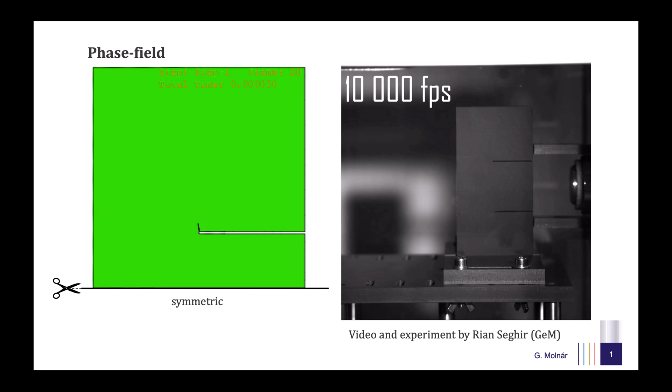To start, I will present a relatively complex example, both experimentally and through simulations. This experiment was conducted by my friend Rian Seghir in Nantes during my postdoc years. Here, a projectile approaches from the left and impacts a polymer specimen.

As the elastic wave reaches the pre-notch, a new crack initiates at a well-defined angle. The crack then accelerates and branches at a specific point. Interestingly, these features remain consistent across experiments, revealing key fracture characteristics.

Remarkably, using just two material parameters, the phase field model is able to quantitatively reproduce the crack's initiation, propagation, and branching. In this talk, I will demonstrate how this is possible through the diffuse crack representation employed by this technique.

I will also discuss the additional phenomena we can model using the phase field approach, how to identify the regularization crack length in real materials, and how we can use this length scale to homogenize the toughness of metamaterials, a property traditionally considered non-local.

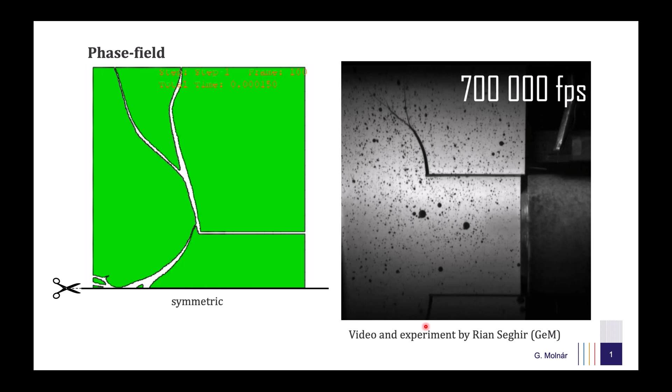I come from a mechanical engineering background, but my research has taken me across multiple disciplines. I completed my PhD in civil engineering, focusing on the material properties of structural glass. My work spanned multiple length scales.

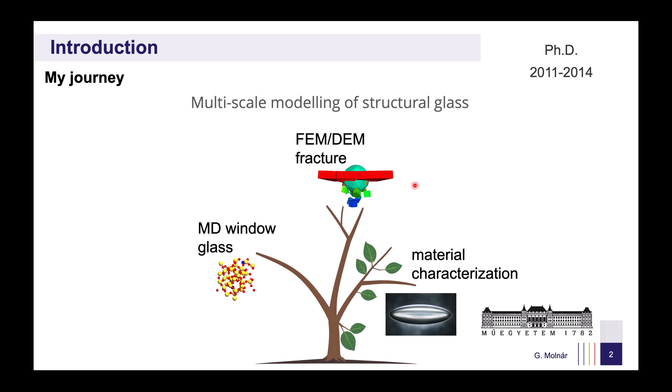At the atomic scale, I studied the elastic properties of glass. At the mesoscale, I analyzed the impact of manufacturing defects. Finally, at the macroscopic scale, I investigated the total fragmentation of tempered glass using the hybrid discrete and finite element method.

My first postdoc took me to Lyon, where I worked on the atomic analysis of plasticity in glasses. Using molecular statics, we identified the microscopic events responsible for plasticity and developed a microscale inspired yield criterion for silicate glass.

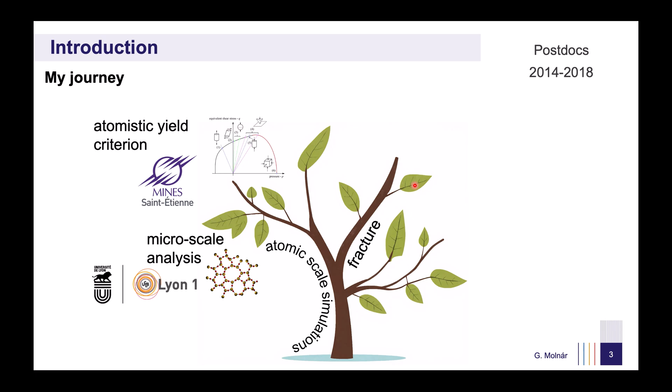Next, in Saint-Étienne, I implemented this yield criterion into a finite element code and calibrated its parameters using microscale experiments. Following this, I moved to Grenoble, where I studied cellulose nanofibrils at 2 different scales, using both atomic simulations and discrete beam-like methods. Realizing that traditional yield criteria fail to account for fracture under tensile loading, I shifted my focus...

...to the phase field model back in Lyon. I then completed my postdoc years in Nantes, working on dynamic fracture in architected materials.

After being accepted into the CNRS, I proposed 2 principal research directions: atomic scale techniques for extracting failure properties from small-scale models. This work led to multiple state-funded projects where we successfully identified internal length scales in glasses.

Macroscopic fracture simulations. This effort fostered a strong collaboration with MATEIS, particularly with Aurélien Doitrand. Through my career, I have worked closely with both academic and industrial partners, notably with the nuclear industry in France and NEG, a glass manufacturing company in Japan.

Most recently, I have opened a new research direction in the optimization of architected materials. This work is now advancing through a collaboration with the University of Sherbrooke, focusing on toughness optimization in silicon-based batteries.

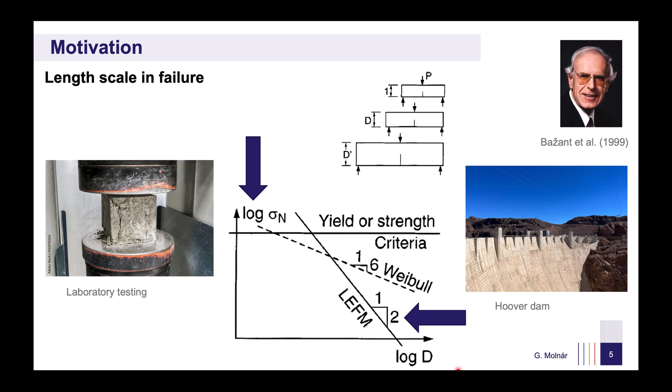My work is motivated by a fascinating phenomenon. Notably, when material samples are small, they appear to be much stronger than when they are part of a large macroscopic structure. This phenomenon was popularized in the 1980s by Bažant, particularly in concrete and rock materials.

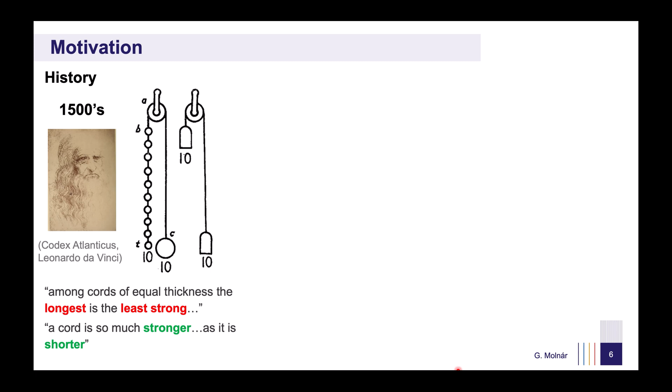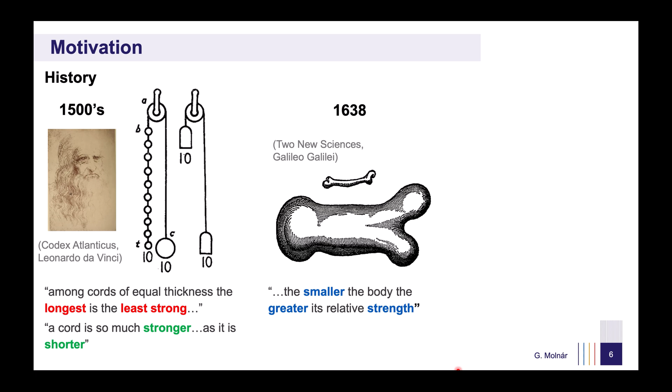The first recorded observation dates back to Leonardo da Vinci, who noted that smaller cable segments seemed stronger than their longer counterparts. Around 150 years later, Galileo Galilei made a similar observation, stating that smaller bones and structural elements tend to be more resistant. However, neither he nor Da Vinci provided a theoretical explanation for this effect.

It took another 50 years for Mariotte to propose a theory. He suggested that the larger the structure, the higher the probability of finding a large defect. Importantly, he clarified that the intrinsic strength of a material does not decrease, but rather the presence of the defect reduces the observed resistance.

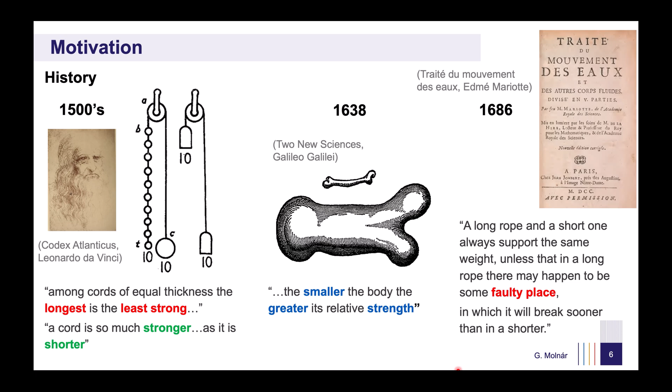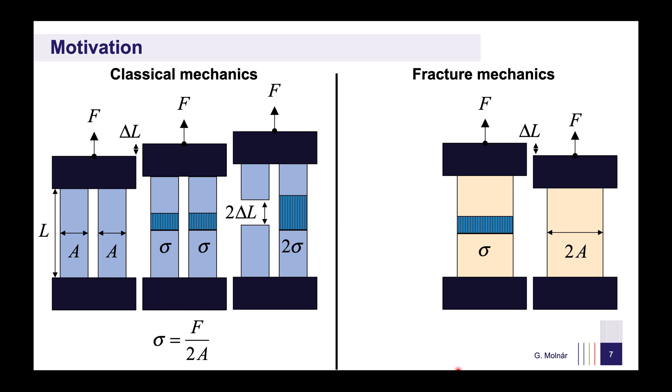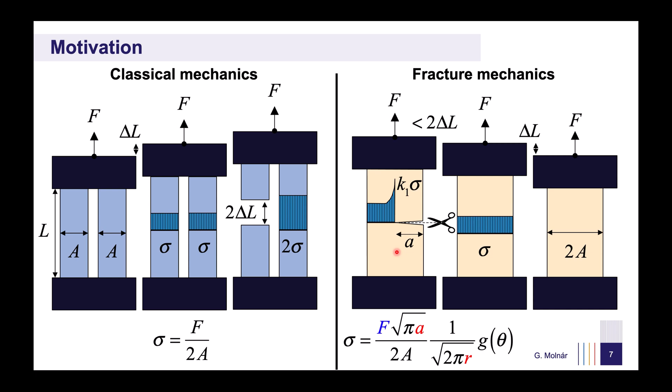However, if we cut one of the columns, the remaining column must carry twice the load, leading to a 2-fold increase in stress. Now suppose we glue the 2 columns together with an extremely strong adhesive. If we apply the same load, the stress remains identical to the original intact case. However, if we cut the sample at the center, we create an infinite stress peak. As a result, traditional mechanics cannot predict when the structure will fail using a simple stress-based strength criterion.

To address this issue, in the 1920s, Arnold Griffith reformulated the conventional approach to material failure. Instead of just comparing stress and strength, he looked at atomistic interactions. He noted that while the maximum force in an atomic bond can be linked to the strength of the material, the interaction does not simply end at the maximum force, it has a gradual decline. From this, Griffith proposed that forming a new crack surface requires a certain amount of stored energy to be released. He correlated this energy to the integral of the interatomic force.

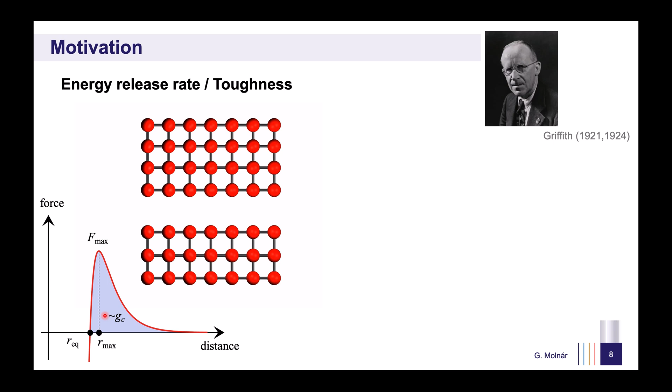Later, George Irwin provided experimental validation of Griffith's theory. He demonstrated that when a specimen is sufficiently large, it behaves as predicted by Griffith's energy-based criterion. However, when the sample is small, its resistance is better described by stress-based failure criterion.

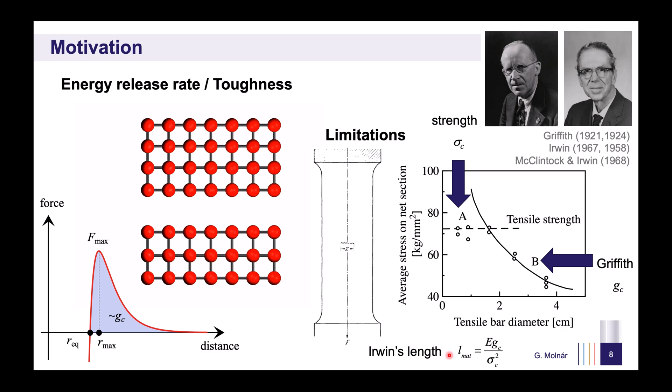Irwin was also the first to introduce an approximation for the transition length scale. He showed that the simplest material length can be defined using E, Young's modulus, Gc, the toughness proposed by Griffith, and sigma c, the material's tensile strength. Interestingly, while Irwin is widely recognized for developing the stress intensity factor, this particular finding was overlooked for decades.

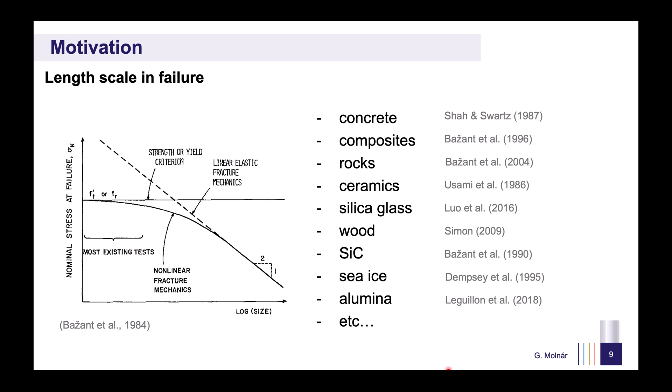Since Bažant's revival of this concept, the size effect has been experimentally confirmed across a wide range of materials, from silica and ceramics to ice sheets.

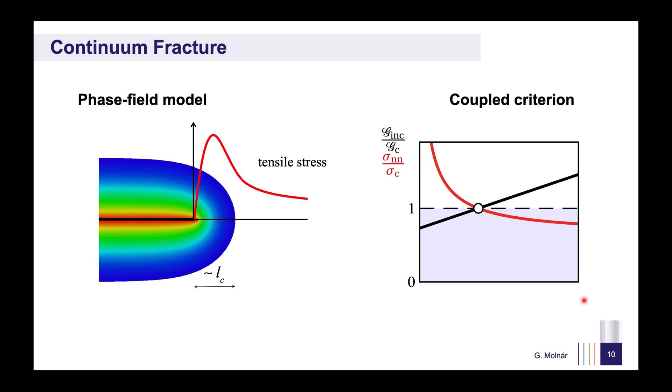In the first scientific part of this presentation, I will show how the length scale parameter in the phase field model enriches linear elastic fracture mechanics. I will focus on simple cases where the size effect is most evident. However, we treated phase field simulations as numerical experiments, essentially as black boxes. To better understand the results, we turned to finite fracture mechanics, more precisely the coupled criterion, to explain the observed behavior. This powerful technique helps interpret automatic results produced by the phase field approach.

The history of the phase field model dates back to the early 90s. It was van der Waals who first proposed a continuous function to describe an atomic bond, challenging the traditional view that these interactions behave like rigid trusses. He was later awarded a Nobel Prize for his discovery.

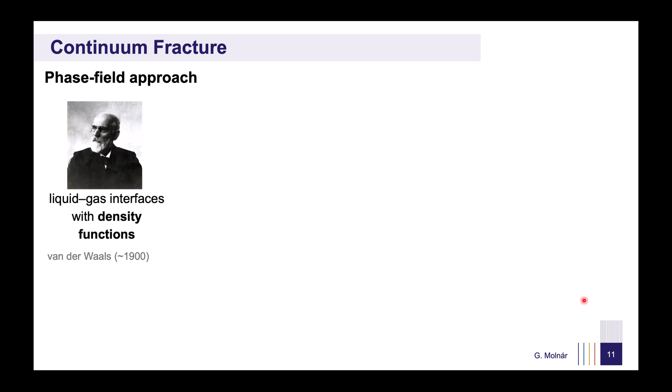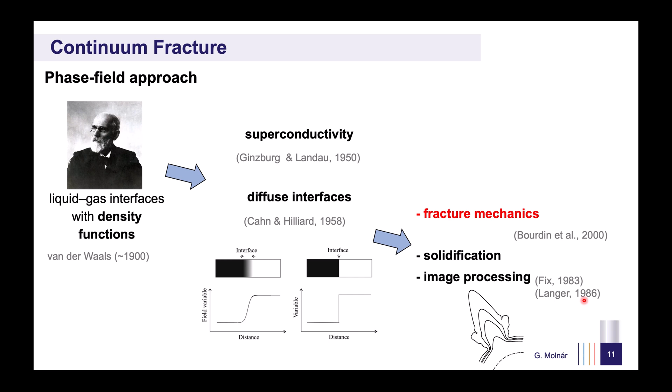However, the mathematical foundation of the phase field approach was established in the 1950s by Ginzburg and Landau. They introduced a continuous function to describe discrete phase transitions, arguing that changes between phases should be gradual rather than abrupt. The formulation we use today, however, was developed by Blaise Bourdin, who adopted classical damage mechanics to establish a smooth transition between broken and unbroken materials using a state variable which we will denote as d.

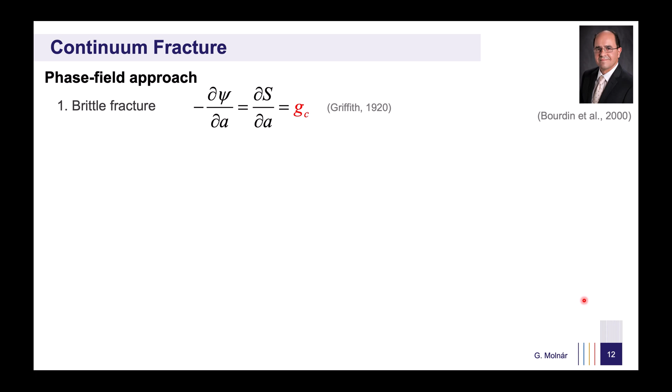Bourdin's approach was based on Griffith's original criterion, which states that a certain amount of energy is required to create a new crack surface. To advance this idea, he used the variational formulation of Francfort and Marigo, which determines the size of the new crack based on an energy minimization principle.

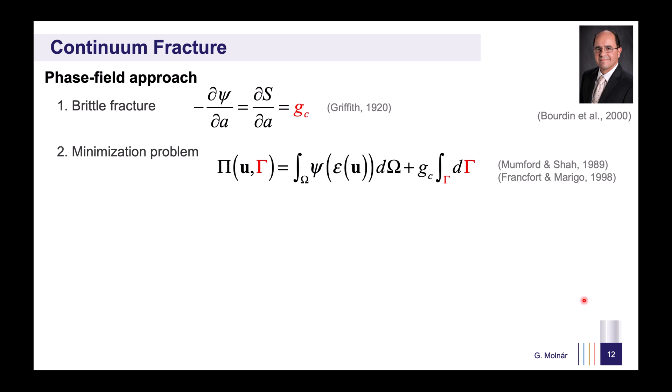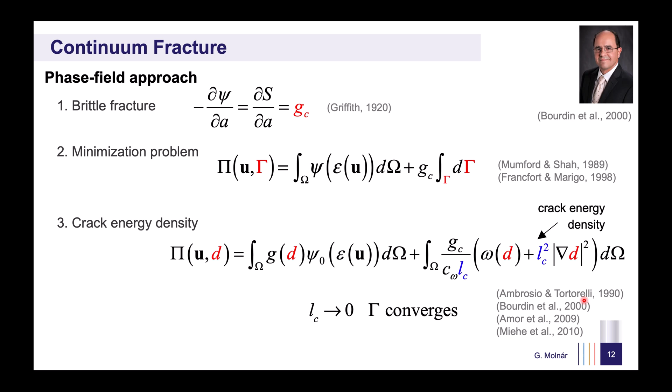However, in their original work, the crack surface gamma was still treated as a discrete quantity. The breakthrough came when Bourdin, Francfort and Marigo introduced the crack surface density, utilizing the Ambrosio-Tortorelli functional to diffuse the crack over a small region, thereby transforming the discrete problem into a volumetric one. However, they ensured that when the internal length scale LC tends to 0, the model recovers the original discrete problem.

In a sense, the phase field model allows us to solve fracture mechanics problems using variational methods. One of its major advantages is that it does not require any additional criteria to model mixed mode crack propagation and reproduces experimental observations robustly.

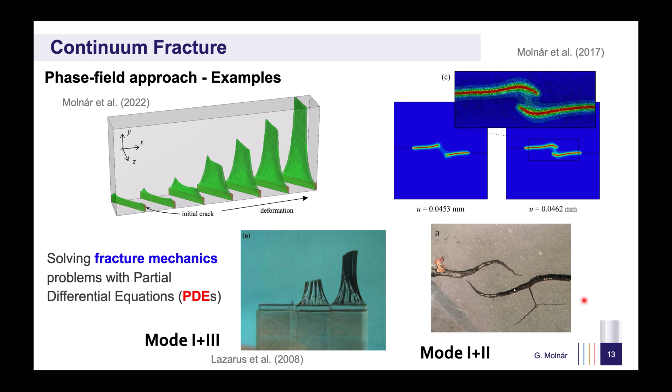In this talk, I will focus on 3 fundamental fracture modes, demonstrating how traditional linear elastic fracture mechanics can be misleading and how different length scales naturally emerge in even the simplest fracture cases. In mode 1 tensile opening, I will show how the initial crack size affects the critical loading.

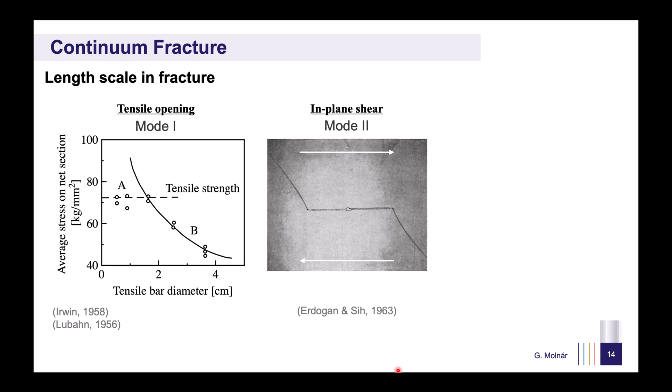In in-plane shear, I will explain why the crack branches at an angle, depending on the regularization scale, instead of propagating in a self-similar manner as originally assumed by Irwin. Finally, in anti-plane shear, I will show how the primary crack breaks into smaller facets, daughter cracks, which then merge to follow the loading direction.

In all 3 cases, we will see how regularization enables insights that are not possible using traditional linear elastic fracture mechanics.

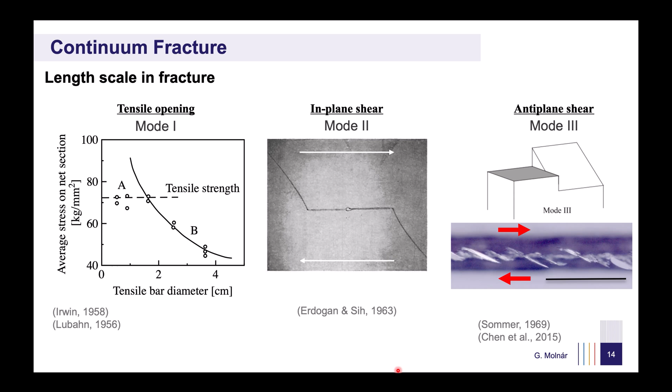However, since phase field simulations do not always explain why certain phenomena occur, we will use the coupled criterion to better understand these numerical results.

The coupled criterion states that a crack can initiate and propagate only when both stress, strength, and energy-based conditions are satisfied. For example, in mode 1 tensile opening, if the applied load is low a longer crack is required to dissipate the necessary energy to create a new fracture surface.

However, the crack does not propagate because the stress remains below the material's strength. As we increase the load, we eventually reach a point where both conditions are simultaneously satisfied. And this defines a finite crack length.

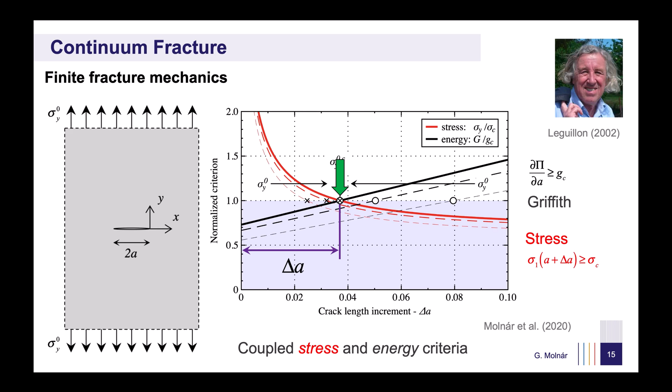By examining critical loading in mode 1, we find that both phase field simulations and the coupled criterion successfully reproduce the experimentally observed size effect. When the initial crack is large, the behavior aligns with Griffith's prediction. However, when the crack is smaller than LC, the failure follows a stress-based criterion.

These results allow us to compare LC, the length scale used in phase fields, with the tensile strength used in the coupled criterion. You observe that as LC increases, the tensile strength decreases, a trend that can be perfectly fitted using the homogeneous solution of the phase field method.

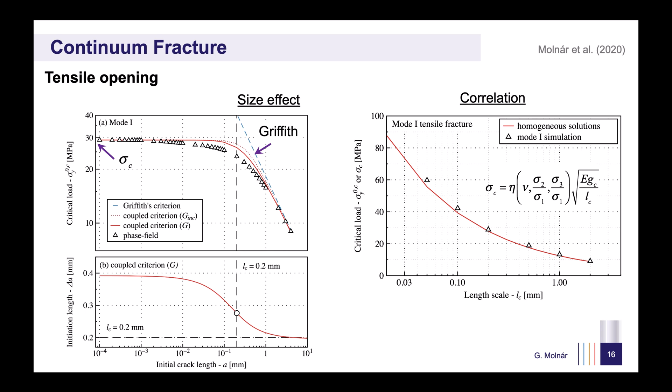For shear fracture, contrary to Irwin's assumption, the crack does not propagate in a self-similar manner. Instead, it branches at a well-defined angle, which depends on the ratio between initial crack size and LC. This angle varies between 45 and 73 degrees.

45 degree corresponds to the direction of the principal stresses in shear, while 73 degrees is consistent with experimental observations for very brittle materials with very small process zone. And it aligns with the maximum energy release rate direction.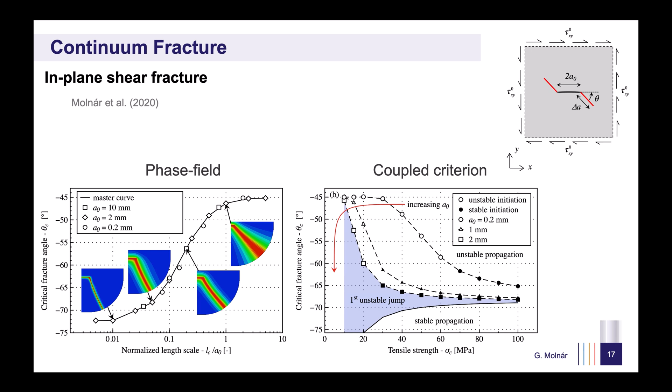The coupled criterion confirms this behavior: when the tensile strength is high, the preferred branching angle is around 70 degrees. However, when sigma c is small, the angle gradually converges to 45 degrees.

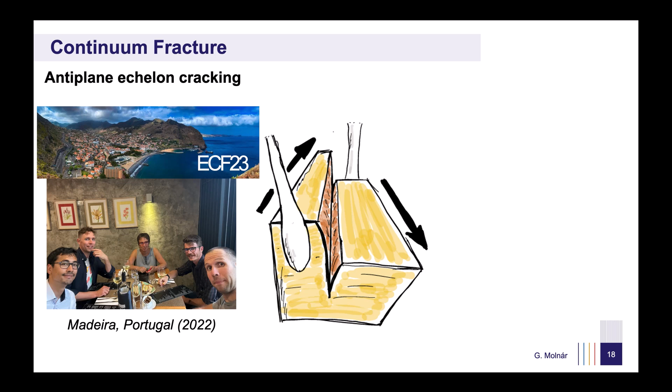The third example was inspired by the conference dinner in Madeira. During the dinner, my colleague Aurélien Doitrand sacrificed his flan, a gelatinous cube. He cut a notch in the middle of the dessert and applied anti-plane shear using 2 forks. Surprisingly, the fracture pattern mirrored those observed in many brittle materials, forming a hierarchical facet-like structure.

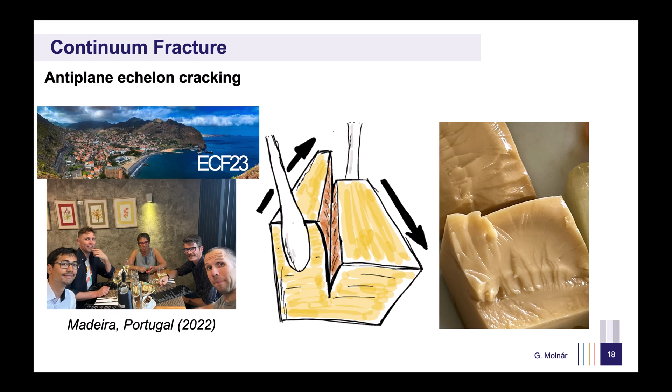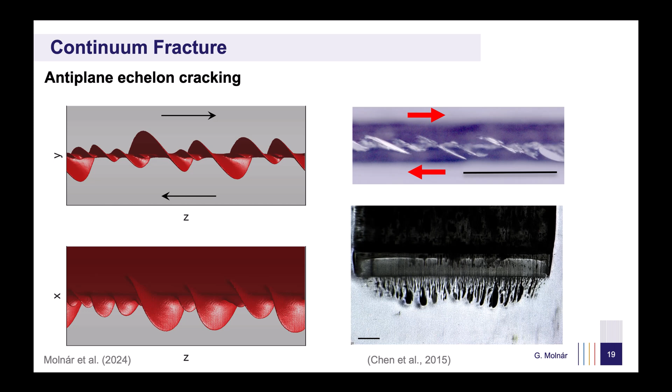Motivated by this, we applied the phase field model to solve the problem, and it successfully reproduced the facet formation seen in PMMA experiments. When summarizing all our correlations, we see the same trend.

As LC increases, tensile strength decreases. However, this relation is not a unique single curve, but rather a failure surface. This is confirmed by plotting the length scales derived from the coupled criteria, showing that all distances scale linearly with LC, but differ depending on the loading case.

This leads to an important conclusion: LC is not the size of the process zone. While it influences the process zone, local instabilities depend on the specific fracture case.

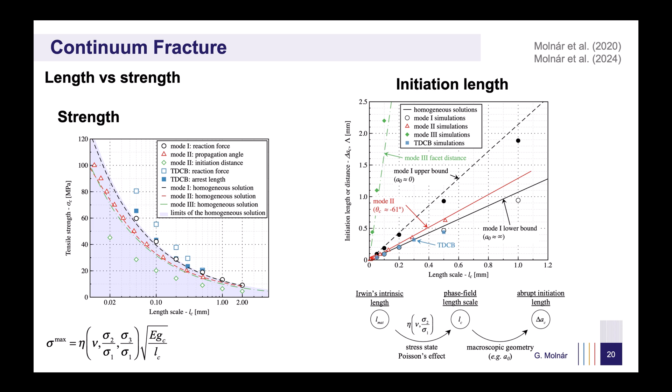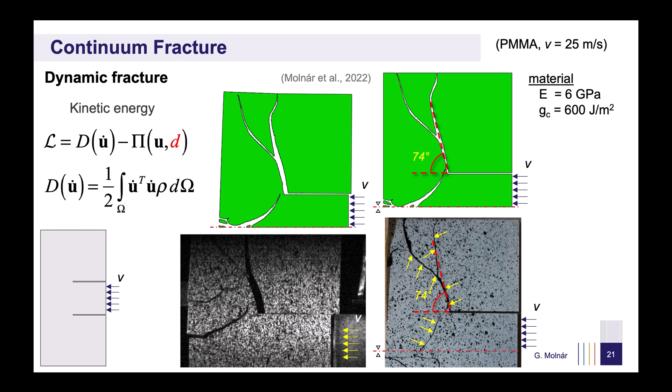Finally, as seen in the introduction, the phase field model can accurately capture dynamic fracture patterns. Using only GC and LC, it achieves excellent correspondence with experimental results in terms of initiation angle, branching location, and crack velocity. Interestingly, in both experiments and simulations, crack propagates at a limiting speed of only 60% of Rayleigh wave speed.

We attributed this to local stiffness reduction in the process zone. However, when introducing viscoelasticity, this limit is overcome, as seen in polymers. Ali, a postdoc at the time, correlated this to local stiffness increments, as illustrated in the final slide.

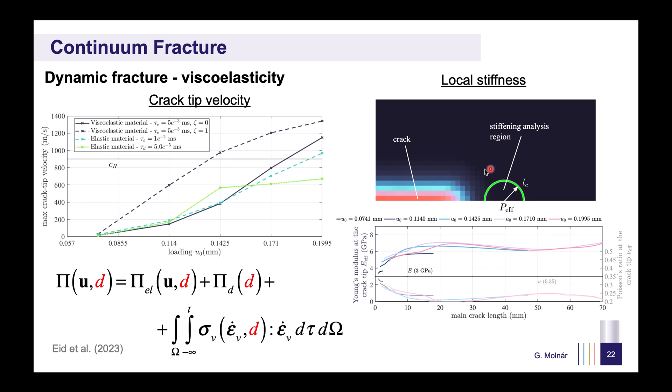We have seen how powerful the phase field model is in capturing various fracture phenomena. Now I would like to shift our focus to an important question: how can we measure different length scales in real materials?

We chose glass as our material of interest because it is relatively simple and lacks a macroscopic length scale. Unlike polycrystalline materials, glasses have no grains, grain boundaries or dislocations, making them ideal for modeling at the atomic scale.

Silicate glasses consist of randomly distributed atoms forming unique ring structures. This structure was first theorized in the 1930s, but was only recently confirmed using atomic resolution electron microscopy.

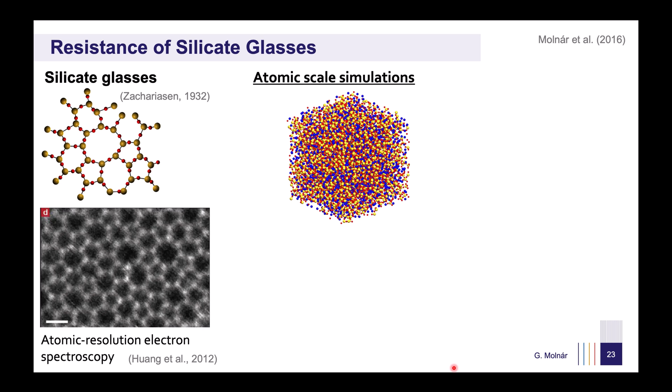In this study, we use molecular dynamics and molecular statics to investigate the mechanical response of silicate glasses. We employed a simpler pair potential consisting of an exponential and a hyperbolic term, with Coulombic interactions handled using long-range solvers or Wolf truncation methods.

The glass samples were generated randomly. They were first heated above glass transition temperature and then slowly cooled to form a stable structure. Finally, we verified the atomic structures using experimental measurements to ensure their accuracy.

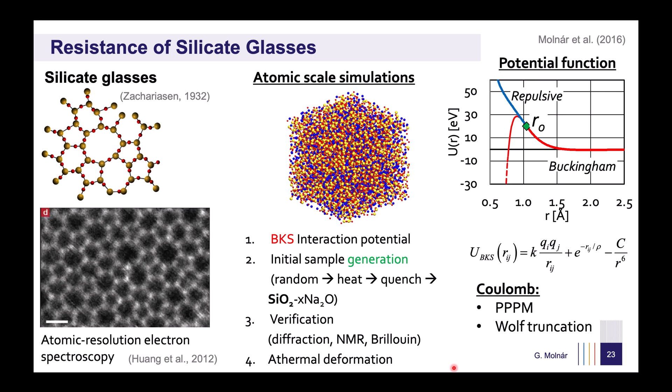To study their mechanical behavior, we applied quasi-static deformation, meaning time and temperature effects were ignored. Coming from a continuum mechanics background, our goal was to bridge the gap between atomic scale results and macroscopic material properties.

To achieve this, we applied a Gaussian convolution technique to coarse grain the discrete atomic data. This technique ensures both mass and energy conservation, allowing us to define continuum-like quantities for atomic scale simulations.

Through this approach, we identify the first length scale, the minimum region in which a discrete material can be considered a continuum. For silicate glasses, this length scale was found to be around 8 to 10 angstroms.

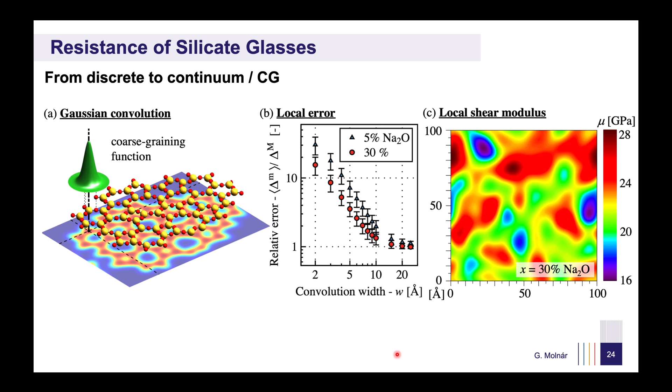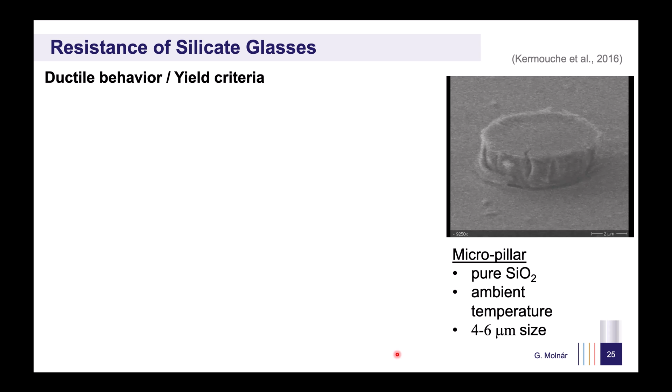Using molecular dynamics, we tested the material under different loading conditions, varying the pressure state, and identified 3 distinct responses: brittle failure, softening, and plastic deformation.

These results allowed us to formulate a densification-dependent yield criterion, which we then calibrated against experimental data, ultimately identifying the yield strength of silica in the range of 5 to 7 gigapascals, a value much higher than those used in standard glass design.

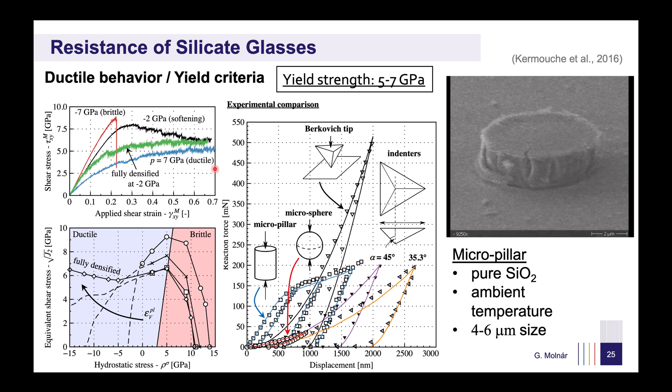At the atomic scale, we can directly observe the microscopic events responsible for plasticity in glasses, known as shear transformation zones. These plastic events involve local shear deformation with a volume change and exhibit an ellipsoidal shape and an exponential decay in strain distribution.

This provides us with a second length scale, the size of these plastic zones, which we found to gradually increase up to 7 angstroms as the material transitions from elastic deformation to plastic flow.

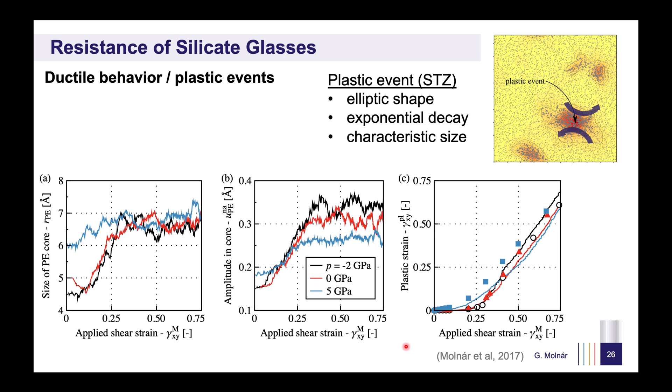By summing the strain jumps in these shear transformation zones, we successfully recomputed the macroscopic plastic strain, confirming that these local events are indeed the fundamental carriers of plasticity in silicate glasses.

When we increased the sample size along one direction, we observed the formation of shear bands due to the localized softening. For a long time, shear bands were believed to form due to local damage, a reduction in shear strength.

However, by measuring local material parameters such as densification, rigidity, and yield strength, we found that shear bands actually increase in density, which in turn increases local rigidity.

This contradicts traditional damage mechanics, which would predict a reduction in stiffness. Instead, the true cause of shear band is not damage, but the phase transition that weakens the yield strength.

By introducing a gradient term to describe plastic strain, similar to phase field models, we were able to recalculate global energy variations and define a third length scale for glass deformation.

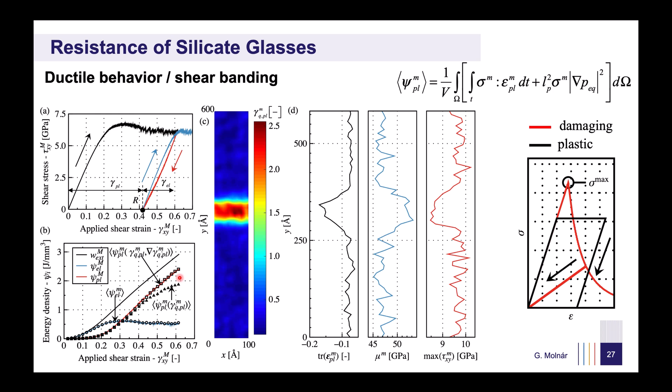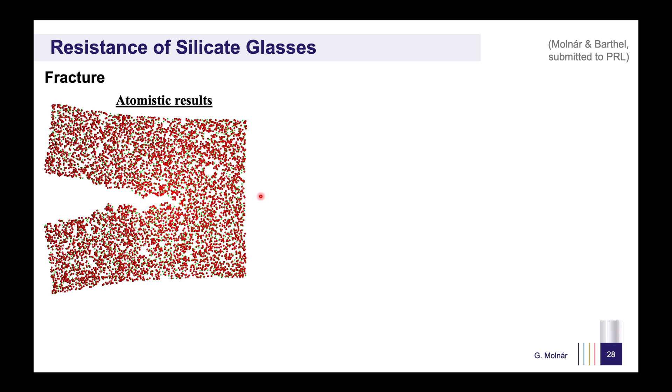To overcome this, we used the phase field model to fit stress, strain, and energy values obtained from the coarse-grained atomic model. This allowed us to identify a diffuse damage zone around the propagating crack.

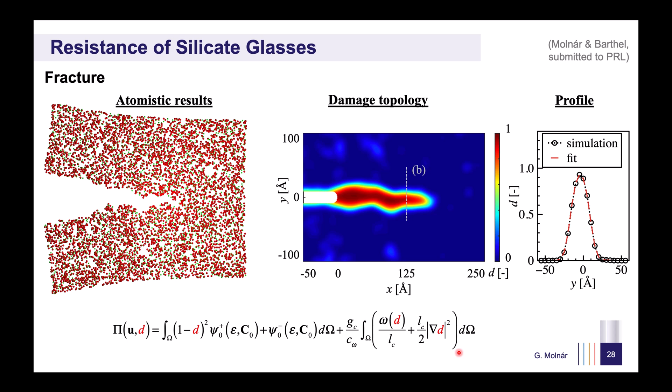With this information, we were able to distinguish between free and fracture surface energies. In theory, both quantities represent the energy required to create a new surface, but experimentally their values differ significantly.

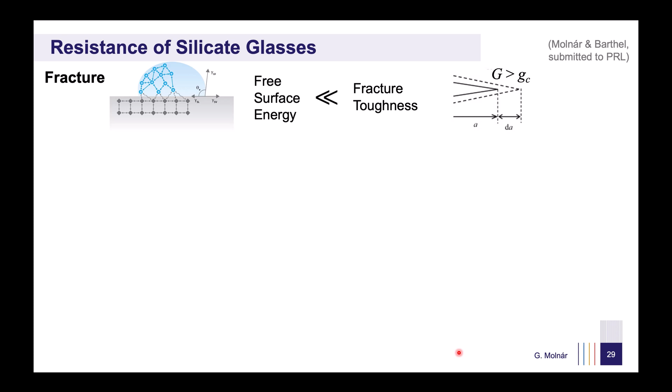We showed that by subtracting the elastic energy from the coarse-grained potential energy, the free surface energy could be made visible. Examining the global energy balance, we confirmed that this free surface energy contributes only a fraction of the total energy dissipated.

By using either the phase field fracture surface or the surface identified through the free surface energy, we obtain toughness values that align well with experimental measurements. This confirms that diffuse damage exists and that it is not plasticity but damage that establishes the correlation between free and fracture surface energies.

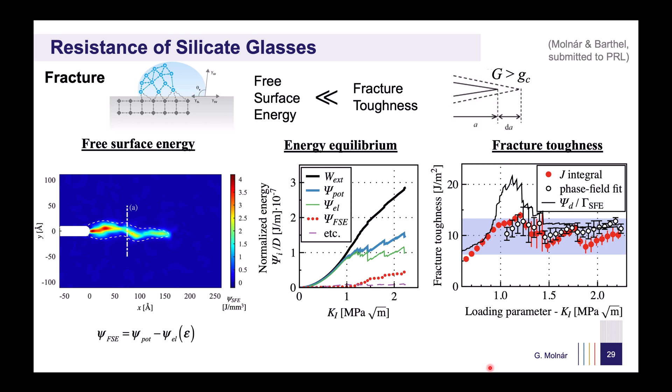Now that we have seen the power of phase field models and how to identify regularization length scales for a given material, let's explore how we can use regularization to determine the fracture toughness of a microstructured material. Mechanical metamaterials, particularly lattice structures, are promising alternatives to bulk materials.

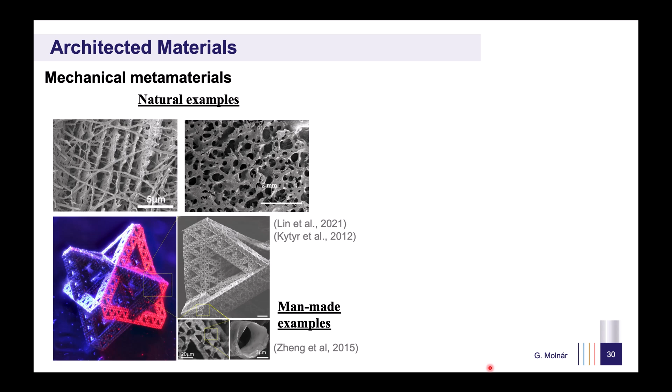These structures are lighter, and because of their small scale, their elementary strength is much higher. As a result, they are widely used both in nature and in industrial applications due to the advancement of additive manufacturing. In this presentation, I will show how we can use both Euler-Bernoulli beam models and a phase field approach to analyze the fracture in these structures.

We will assume that the beams themselves are flawless and that the junctions do not introduce stress concentrations. The beams fail when the tensile stress exceeds the critical microscopic stress value.

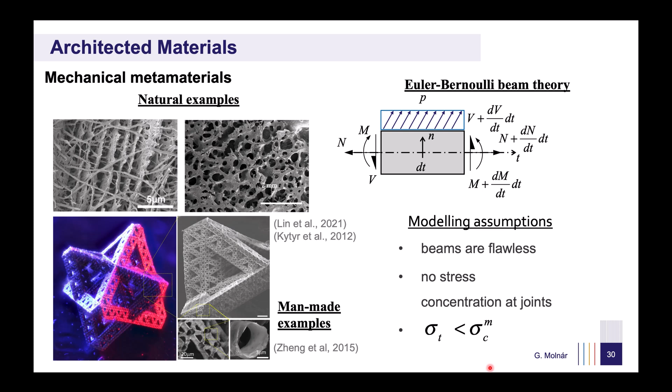This leads us to an important question. If the representative volume element contains all relevant mechanical properties, could we determine its fracture toughness and create a homogeneous phase field model? This phase field model should fail at the same critical load as the lattice and reproduce the crack patterns observed in the microstructure across different loading conditions.

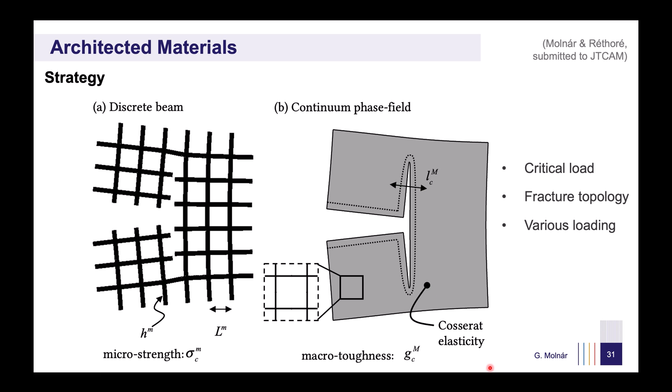Before constructing the model, we need to verify that the unique fracture toughness exists for a beam structure. To do this, we observed crack propagation in the beam model. By measuring the crack length and tracking the change in potential energy, we could define a critical energy release rate. We found that apart from initial fluctuation, this value remains constant, independent of the crack length or geometric features.

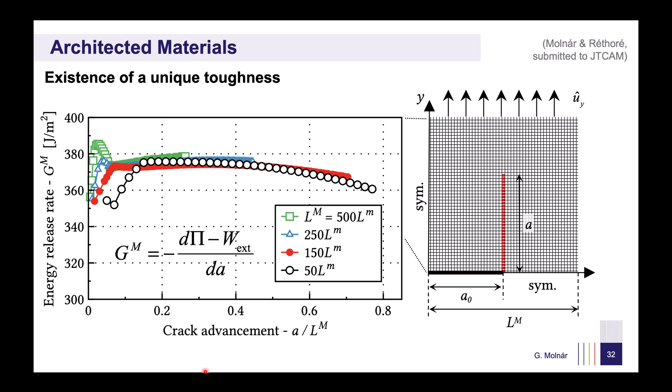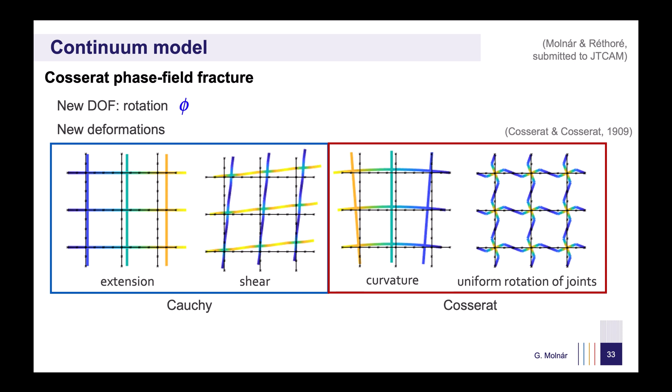To transition to continuum models, we adopted the Cosserat theory, which introduces an additional degree of freedom and independent rotation at each material point. This allows us to incorporate additional deformation effects beyond the classical Cauchy elasticity, such as extension or shear interactions. In this new model, we introduced curvatures and independent rotations, enabling a more refined description of the deformation and failure.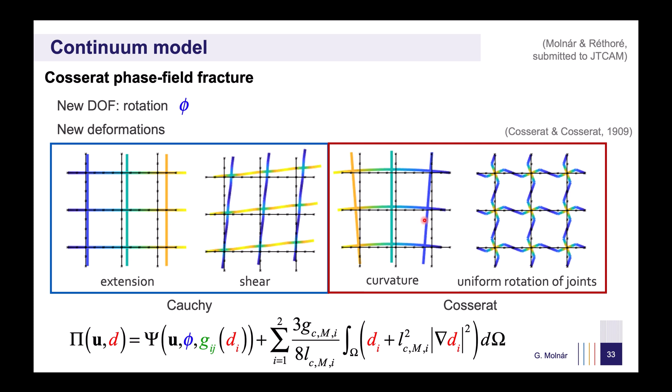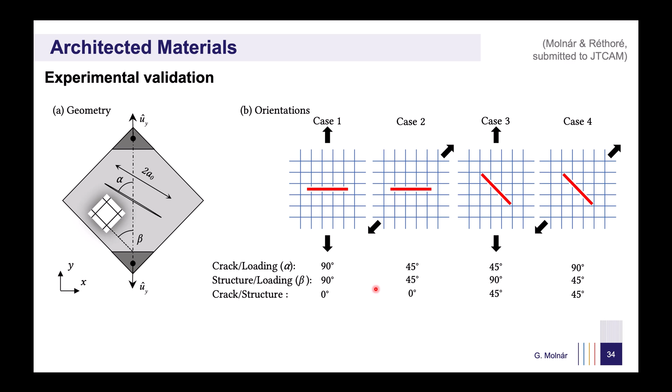Finally, we defined the Cosserat energy and introduced two independent damage variables to account for fracture in two perpendicular directions. Because of the underlying microstructure, fracture in these materials involves a directional dependence, leading to four principal combinations of failure modes. Comparing our simulation results to experimental observations, we found excellent correspondence between both models and real-world fracture behavior.

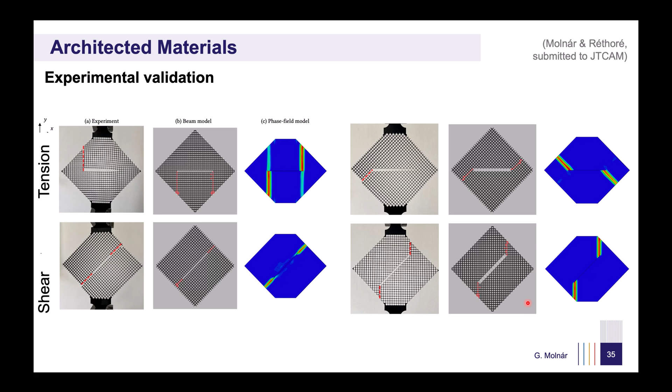In conclusion, this work demonstrates that although regularization length was introduced as a numerical aid, it plays a fundamental role in modeling and understanding complex fracture phenomena.

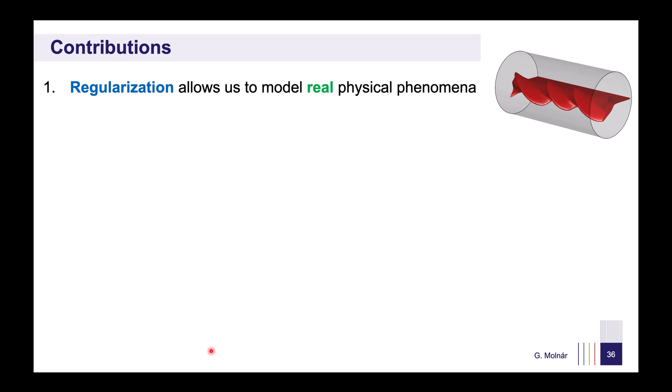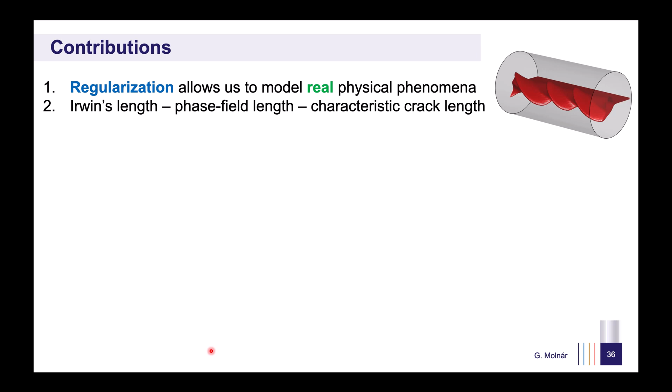We showed that different length scales arise naturally as a function of geometry and loading, and that these instabilities are not necessarily equal to the length scale used in phase field models. This regularization mechanism is what allows us to recover experimentally observed dynamic crack velocities.

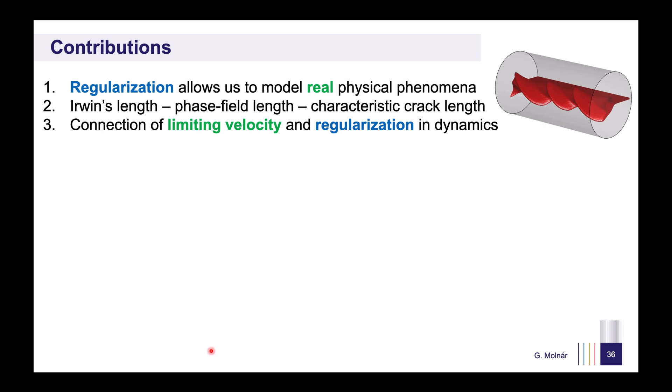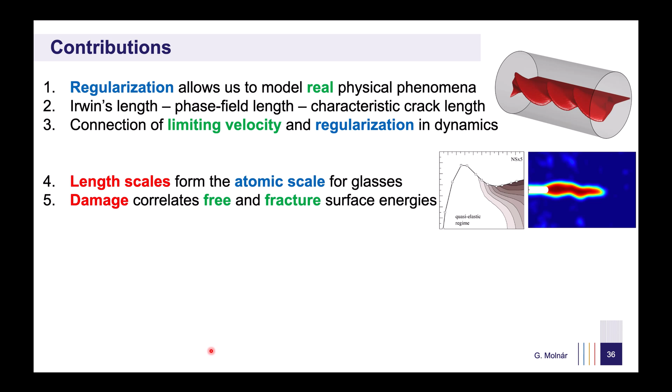Furthermore, we have demonstrated how length scale can be measured in real materials using silica as a case study. Additionally, we showed that damage diffusion allows us to correlate free surface energies with fracture surface energies, addressing a long-standing question in fracture mechanics. Finally, we used regularization to demonstrate that a unique fracture model exists for lattice structures.

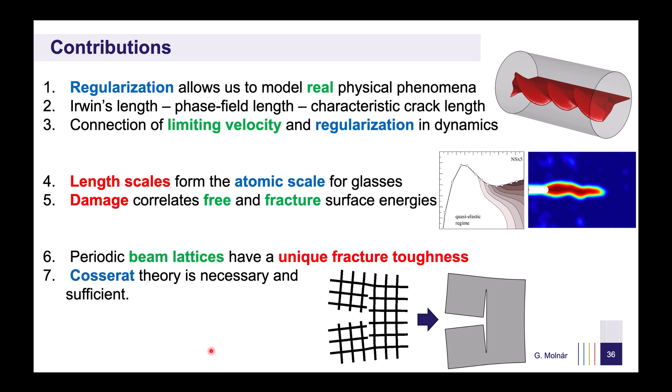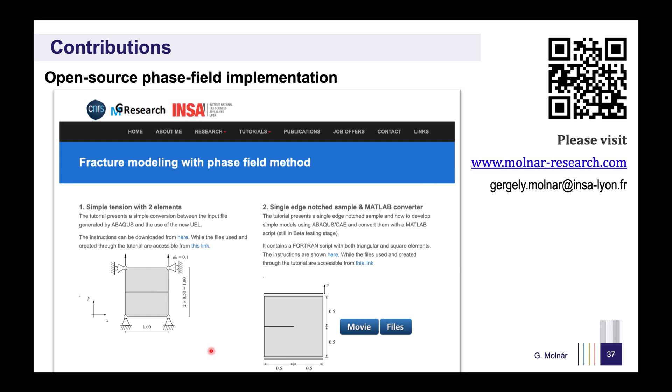And finally, we established that the Cosserat description is necessary and sufficient to modeling these materials, both in elasticity and in fracture. Most of the code used in this study is included in the supplementary material of the corresponding paper and is also available on my personal website, along with several tutorials for those interested in further exploring these models.

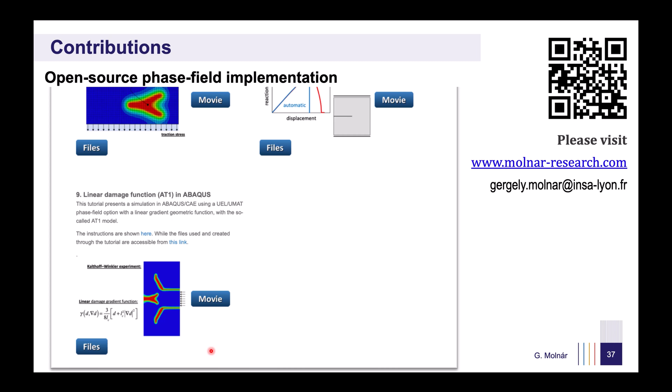However, there is still much work to be done. For instance, it would be valuable to observe how the process zone develops in real experiments. In the near future, Thomas' work will focus on developing non-singular fields for phase field models. It is well known that the traditional singular Williams series approach overestimates the toughness in simulations.

To address this, our approach aims to incorporate a regularization field analytically, providing a more accurate and physically consistent representation.

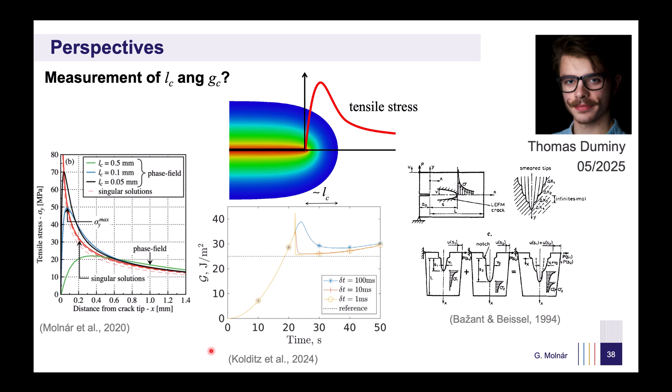Meanwhile, Suhail will integrate our atomic scale observations on silicate glasses to upscale the material model. His work aims to improve our understanding of the indentation resistance of these glasses by employing a sophisticated phase field fracture model for both cracks and shear banding.

Finally, at the metamaterial level, Tom's PhD focuses on optimizing the microstructures of silicon-based anodes. While these materials offer a capacity 10 times higher than their graphite counterparts, they are highly prone to fracture under repeated charging and discharging cycles.

To address this, colleagues at Sherbrooke University have developed porous metamaterials designed to accommodate the significant volume change. Tom's work focuses on optimizing these material architectures using the phase field model to enhance their durability and performance.

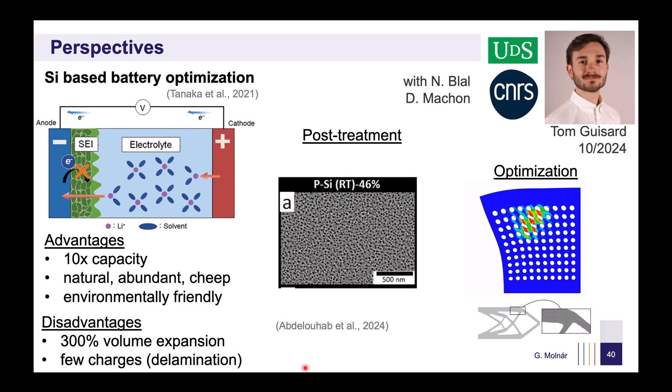However, the ultimate goal is to develop a universal design tool capable of optimizing the toughness of architected materials by effectively trapping crack branches. Achieving this would require developing a robust technique to homogenize the toughness of microstructures, using a continuum-based method to optimize the topology of the envisioned structures, and then finally translating these optimized designs into real beam lattice materials.